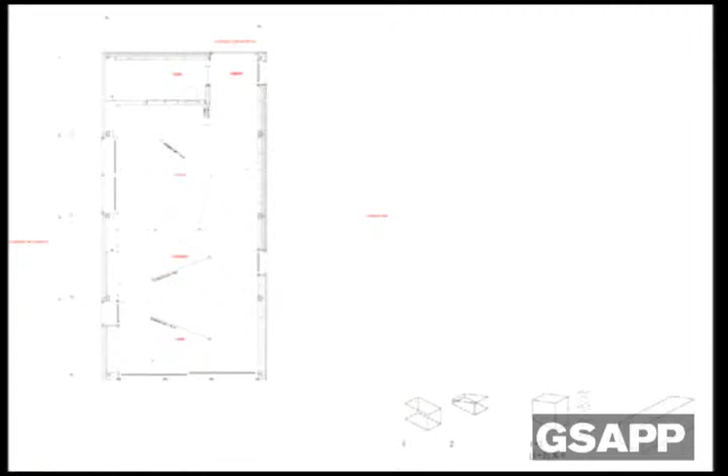With this collection, the only traditional architectural activity we did was to plant these steel columns in the site. We eliminated the sand accumulated for years on these stones, and during the winter, the water and snow were cleaning and washing them. In the spring, we placed these columns to receive the house. While planting these short columns, we expressed the idea of not touching the ground.

The house was built in a workshop outside of Madrid, a workshop not specialized in building houses. This project is not fascinated with the idea of building houses in factories—every time architects have tried that, it's been a disaster. This is one single house built in a workshop and moved to the place.

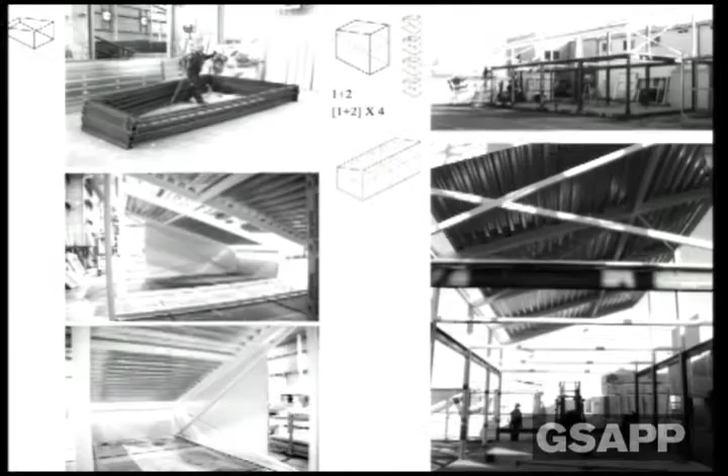It was nice because for four months we were visiting this place every day, and the project, the construction solutions and the construction systems were made in real time with machines folding the metals and cutting, not necessarily drawn previously by them.

We were limited by the machines we had there and the resources, and couldn't complain about not having this or that size. So they were trying to answer our necessities or interests in the best way, and all we could do is correct the details in the process to build the house.

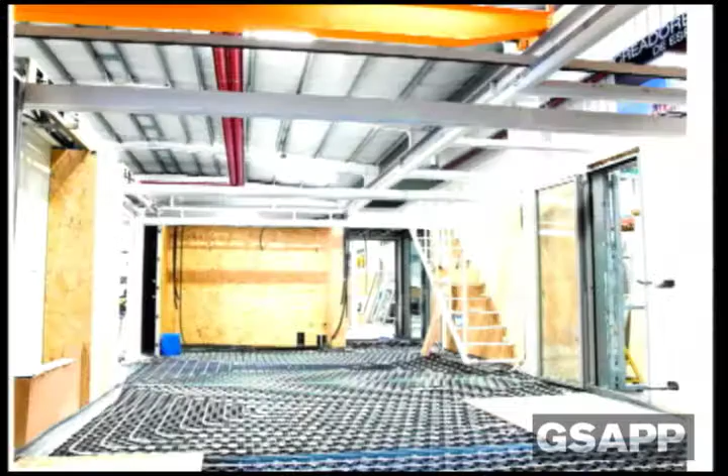That allowed us to have some technological inputs in the project that would have been impossible to do in the place where we were working, where there is no water, no electricity—we get all of it from the ground or from the sun.

So the house was built in these fragments. What's nice is that in one moment you see on the right, we test the assemblage of the different pieces, and the 40 guys who had been working in the production said, 'Hey, it's a house.'

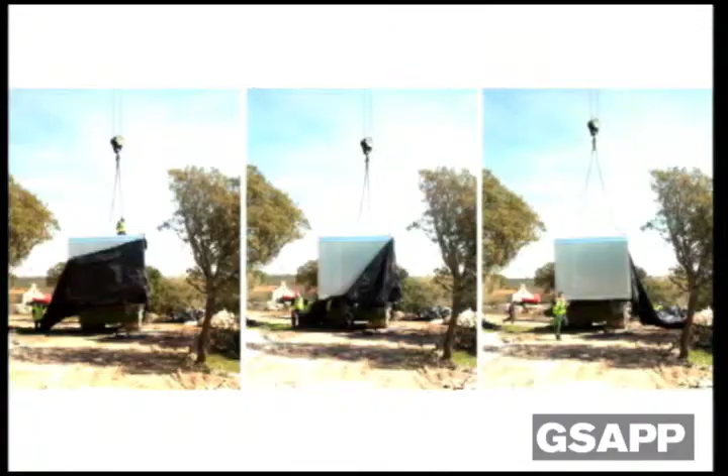So we moved to the place, and we planted it there. The house stayed with a beautiful attitude, no?

Looking at the landscape and appreciating it, showing clearly where to look, where the beauty is, and not trying to emulate or integrate with the materials, colors, textures, or even the shape. All of this is completely contrary to the regulations about popular construction in this kind of context in Spain. But we argued that it was like a big truck.

Stop it for a while here. So the house is there, and it really represents this idea of exploring new relations with nature—not the relations of fascination, not the good and bad divisions of history. It's not expressing that the city is always bad and nature is always good.

The interior is completely industrialized and simple. And I have a video here.

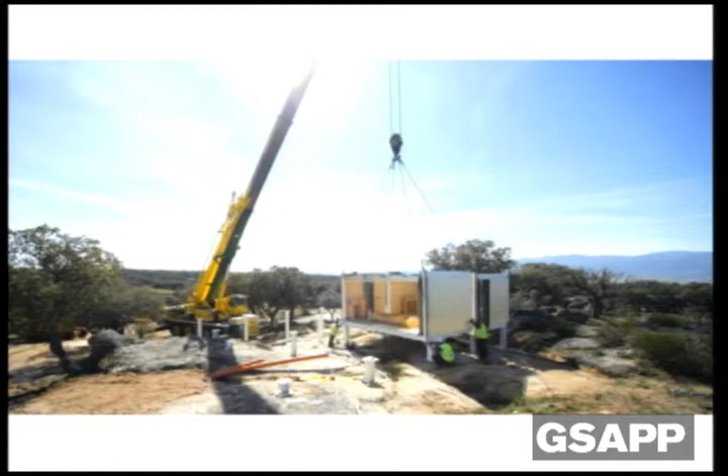The house was installed in 12 hours, from 8 in the morning to 8 at night. This is Spain—now it's siesta time. So, 11 hours.

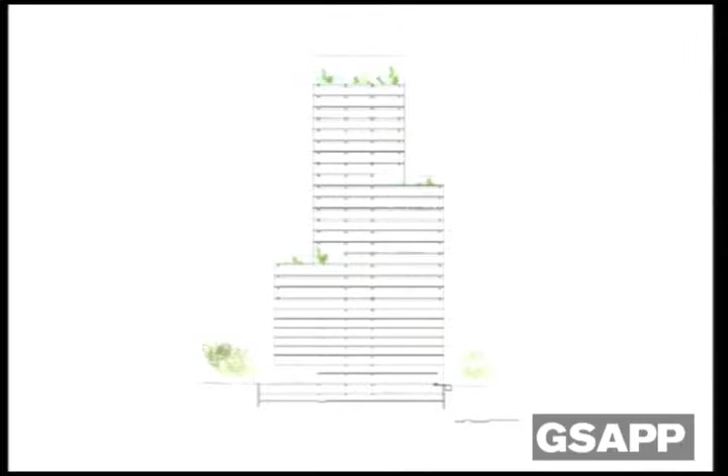And I explain this because we will see something. So we were organizing this project. We got this chapter of designing the typology, of inventing the volume, taking care of the general typical floor with a core and a structural composition that could allow these different step backs of the setbacks of the tower going up, and also the parking.

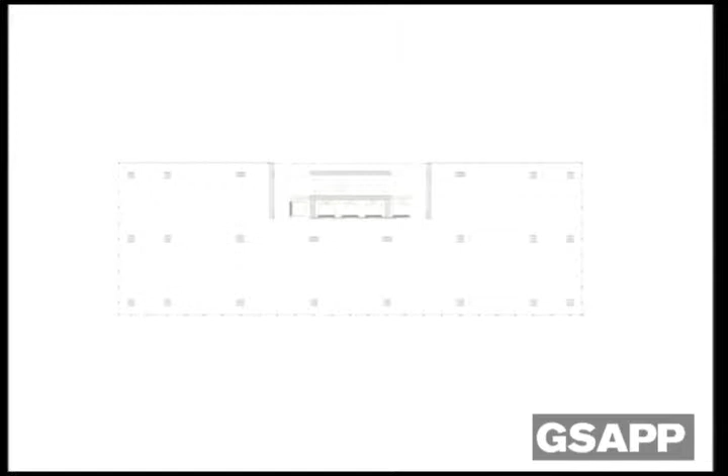So we were working on this parking. It is a kind of main lobby and main reception space in these buildings, nothing related to the interior of the rest of the building.

And of course we designed also the facades with the idea of this random composition of the facade - first, it's impossible to count the floors of the building, so that's good when you have fewer floors than others. But also to make visible these points, these accents where the tower represents a kind of main space of every one of these independent buildings.

And also to be able to integrate these ventilations in the garage floors, mimicked with the working space on the top floors, which is curiously the first time it was done there. It's the first time that the tower in the parking floors really looks the same as the rest of the building, more or less - and not like a parking without any other intention.

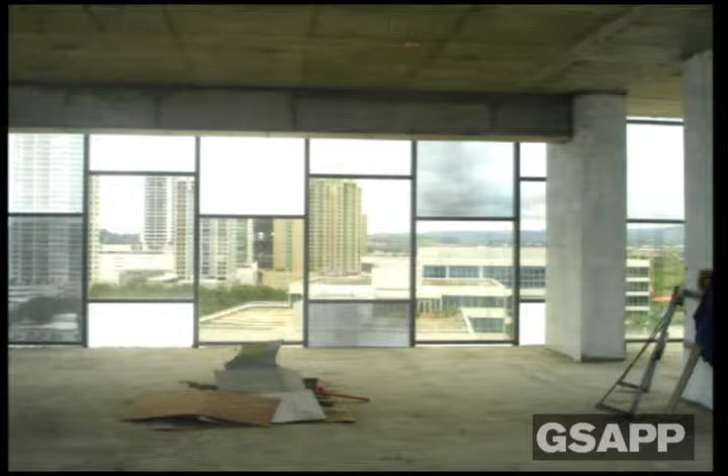I'll show this fast because the elevation works with these pixelized glasses, a composition looking for environmental equilibrium in terms of solar energy incorporated into the building. So we can manipulate the different elevations of the building, but also create this pixelized perception of the environment, which is not very interesting when the buildings are close, and more interesting when they are far.

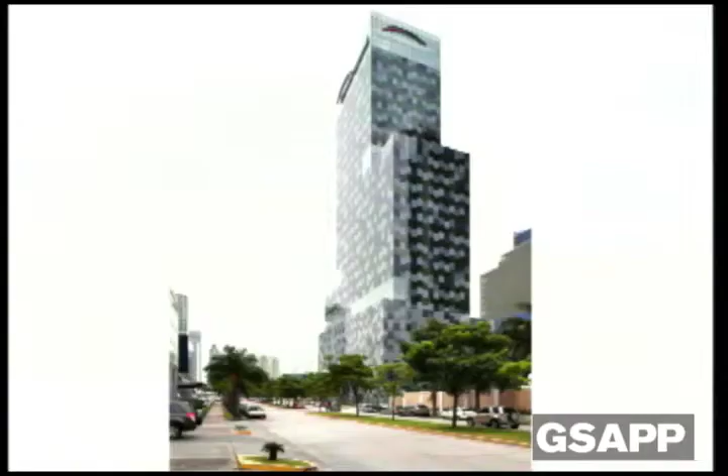So from the outside, it's difficult to believe that every one of those pieces is glass - these are the ventilations of the garages. Here you can see these garages creating an urban spirit and urban presence of this tower at night. And this is something I really love.

You see this is the credit card of Ignacio Mayol, perhaps you know. So this is the moment in which you design a tower for a bank, and the bank puts your building on the credit card, you know. It's really interesting that the idea of the building can really be incorporated like a communication instrument or like a corporate image. This has happened many times in history, of course, but I think today these two items are more and more important in our society and culture, and we have to take it seriously.

The third architect is this architect as mediator. That means we don't have the power, or don't have all the power like usually we had in the past - or perhaps we hadn't, but we complained a lot for not having it. But now we can not have the power and be happy anyway.

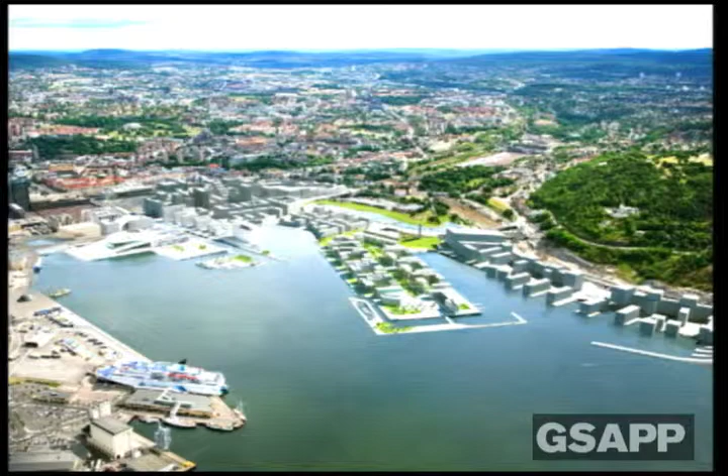I'm going to show this fast. Oh, this is just a better view.

And this is the building. This is from the competition image.

I'm going to show only documents of this building done with the intention of establishing conversations or open dialogues, or to answer questions or concerns that we received from many different points.

This is a diagram, you don't read it very well, of the people involved in the project. This is one of the diagrams we had to prepare to explain how complex a project like this is today, where the architect is not in the center. I've shown this diagram a couple of times. The architect is on the right, perhaps sometimes has to go to the center, but not all the time. The client has a very prominent position, and the consultants, technicians, experts, and the local office we work with, LPO, have a quite important role in the project.

So this is also to explain how today the projects we do are the result of the selection of an incredibly big collection of different inputs of information, bits of information that all these people give to us, and how you select them and reorganize. That is the project, the contemporary architectural project.

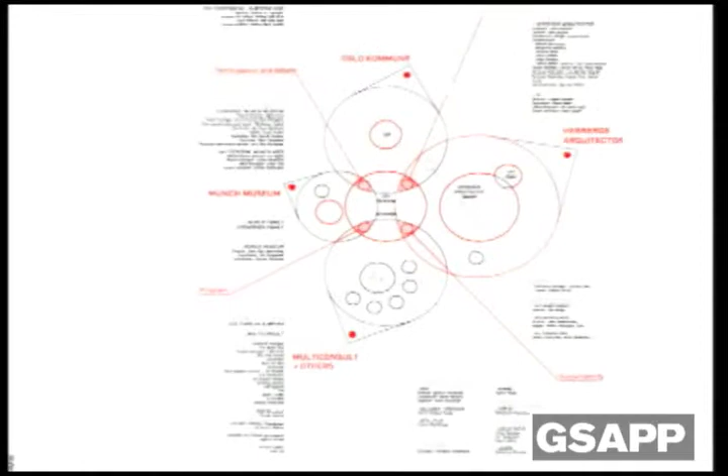You see these 4 points. One of them is participation and debate, urban planning, sustainability, and program. Participation and debate is the one I want to refer to in this description.

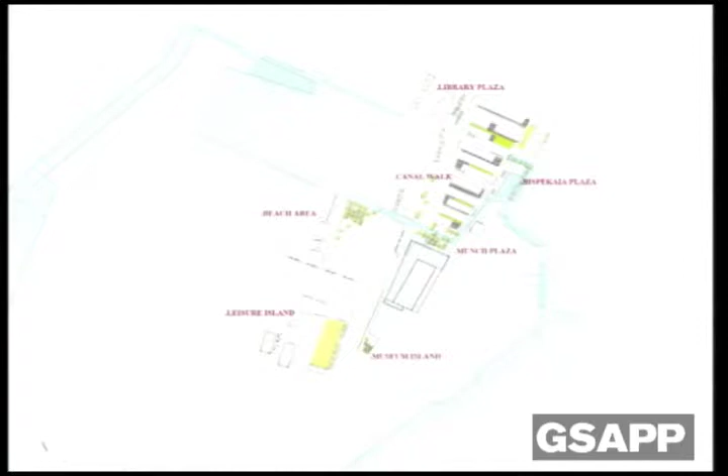So we started with this drawing explaining how important it was for a museum like Munch to create enough public space around it. So one of the reasons to be vertical was to not expand across the site. That is a very tight space, and many of the competitors were using all the ground. That means the museum was not really offering the citizens more than a building, which is good for tourists, but for the citizens, it's perhaps better to have all this space.

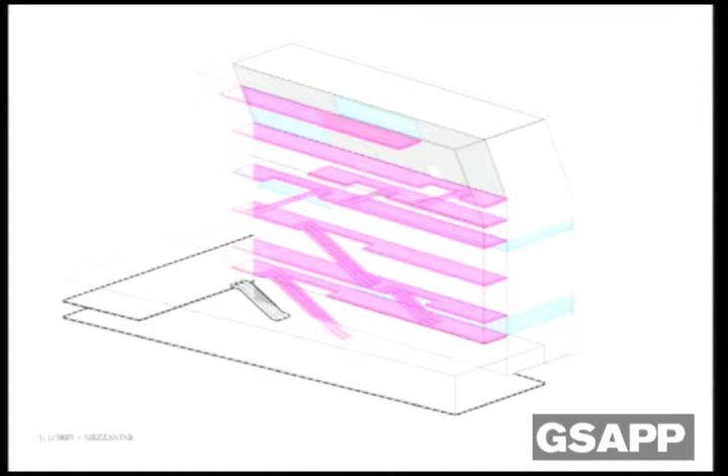The second was about this concept of creating a kind of vertical plaza, connecting the lobby with the top of the building, something that could be open at night, also when the museum is closed, and dividing the project completely into 2 parts: the dynamic part and the static part. The static part is the museum itself. It's a collection of rooms that you have to enter, watch the pieces of art, and go out and go to the next floor. That means the rooms are only for people who are inside watching the paintings, not necessarily crossing because they want to go to the next one or whatever.

So this idea of creating a kind of public infrastructure superimposed on the museum program - you see 2 colors here. The 2 colors are because one of the problems on this site, which is by the sea, was to place all the services of the museum. You know that in a museum today, the services or non-exhibition spaces are more than 50%.

So our decision was to place that in between the exhibition galleries, so people going up through this kind of collection of platforms could also understand that the restoration department, the administration department, the education department are there, and they are huge and important. There are 100 people working not only to preserve a collection of paintings that are highly valuable for every Norwegian, because Munch is finally the most important artist in history. They are really working to make this like a condensator of urban life and experiences.

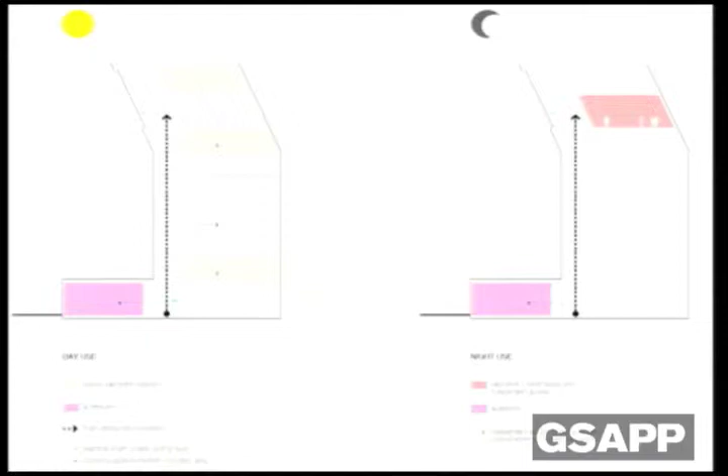And the building, the museum, is for the people. It's mostly for the Norwegians or the people from Oslo, more than for the tourists who are only using, let's say, the galleries. So this is the first lobby we drew. This is the first dynamic part, and these are the galleries.

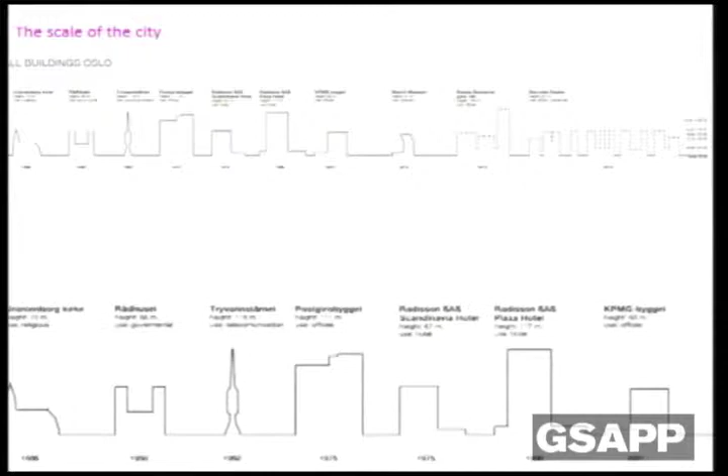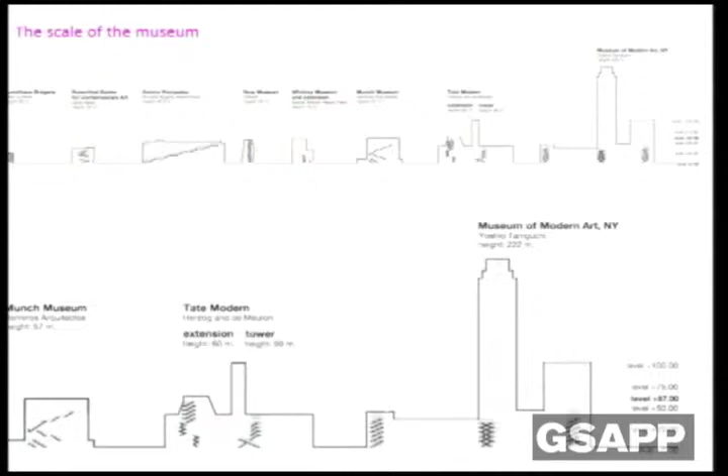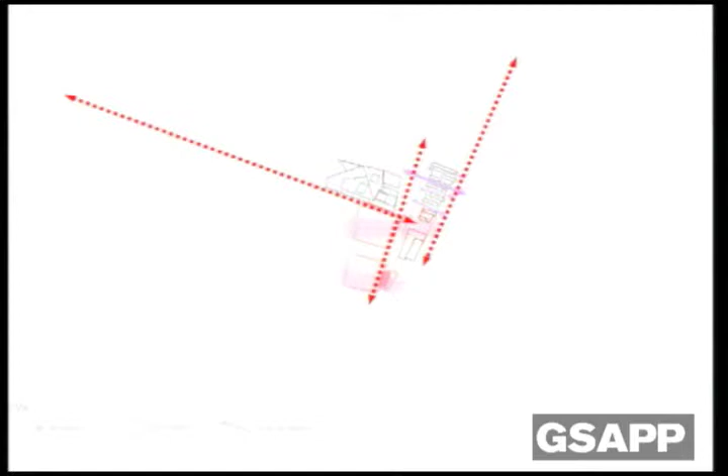So we did all these comparisons of the high-rise buildings in the city, or vertical museums in the world, or how we were actually creating the starting point of a very important axis in town, engaging all the other museums existing and future. We did hundreds of these models to explain why we were proposing this. But at every step, something new arose or landed in the project, and something was changed. Apparently not that much, because the shape looks the same, but really the building itself changed a lot, or at least from our point of view as architects, we know where.

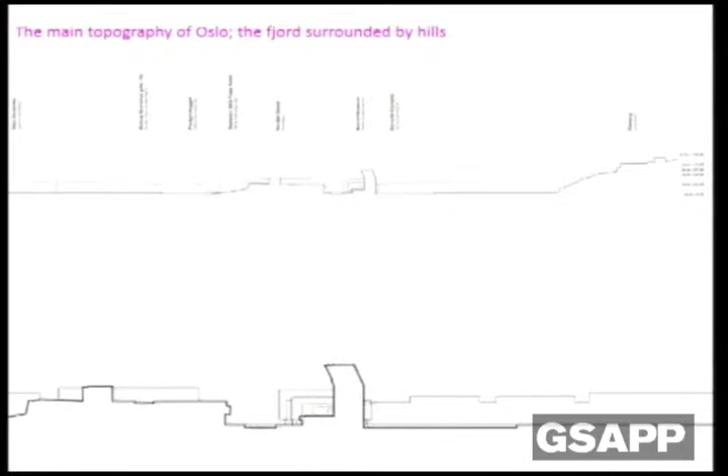Especially in the interior, the changes were very, very important. This is because of the views. This is a kind of sacred mountain. It was where the city was actually founded initially, and so we were competing with it.

So this is the only floor plan I'm going to show, to explain that also in the interior design we had long conversations about the general organization of the floor plans, because they were very simple. But we did research about the ideal size of art rooms for museums, and we discovered that 90% of the big exhibitions going around the world in itinerant programs ask for 900 square meters, more or less - that's 9,000 square feet. What that means is it's better to have 600 and 300, like a big room and a small space for small pieces or whatever. So that's why we divided the floor plan into these two rooms, and we placed this core.

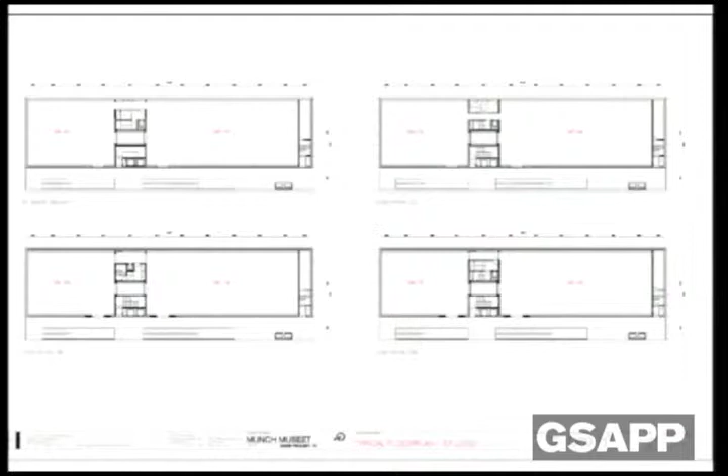I'm not describing the building, and it's not my intention. The intention is to describe all these discussions. This is a discussion about the program.

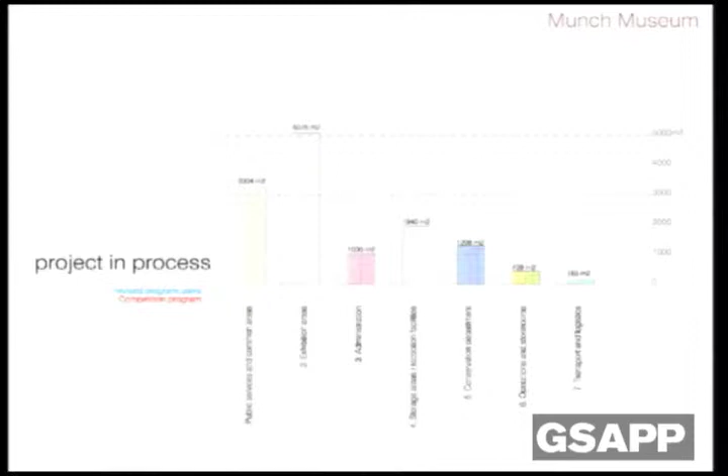In the competition, you see the exhibition space that we offered and the services. At the first meeting, every person at the head of these departments were asking for more, so the only area to take off was the exhibition space. That was the second meeting we had - this was the exhibition space, and all of them were happy, but not the director, of course. So very slowly we started to grow again, and for that we had to compress, we had to change the floor plans, we had to demonstrate that it was possible. But in this process, many things changed.

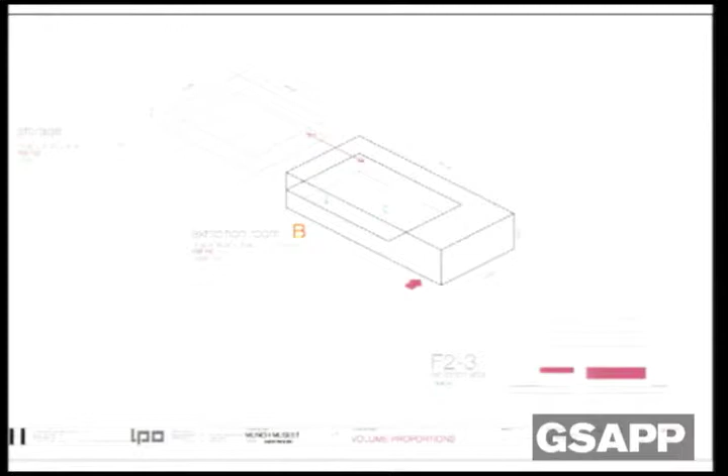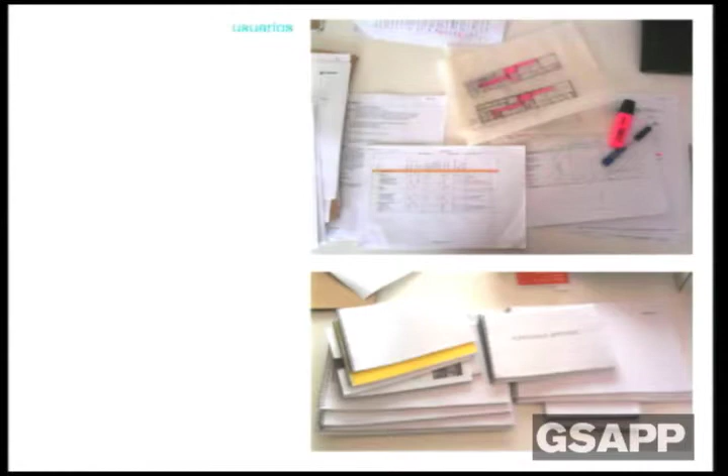I hope you don't understand Norwegian.

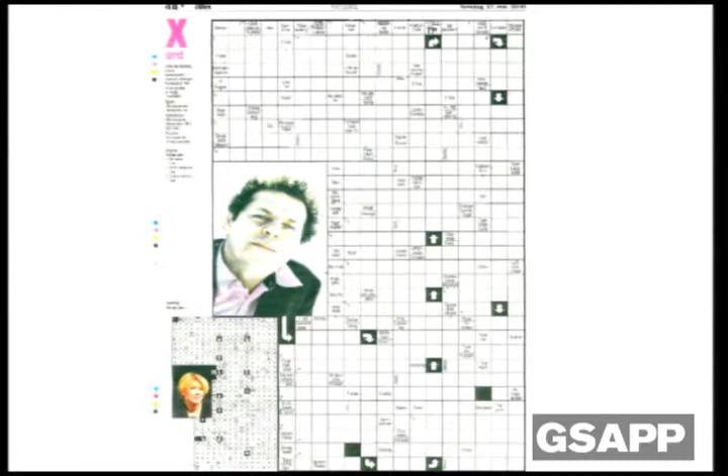But this is what I like most, because if you do this in Spain, nobody would have a beautiful Sunday - this is in the Sunday newspaper. If you don't know my name, you can't start. So that means - and the question was something like, this guy will build the Munch Museum if the Heritage Department lets him do it. That means that the director, or the people at this newspaper, which is the most important newspaper in the country, was completely convinced that the people should know Juan here. If you do this in Spain, nobody knows. This is a demonstration of how today, in many places, in many societies, especially in these super democratic countries where everybody has a voice that has to be attended, these phenomena are incredibly viral and strong.

This is the last of the communication ingredients - a torch parade. Torch parades in Scandinavian countries are quite an important demonstration. They are never done for political reasons; they are only done for humanitarian motives, something that everybody should agree on, like against war or any social concern. It was the first time that a cultural concern was raised in a torch parade.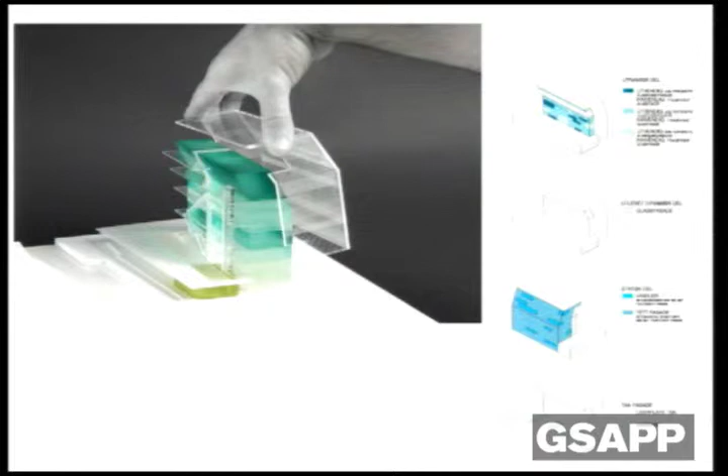So the last chapter of the discussion is about the facade. We were looking for this enigmatic, blurring presence of the building, with the idea that the weather in Norway is cloudy, but also quite rich in different lights.

Every hour is different. Edvard Munch had this interesting attitude—he never painted landscapes outdoors, he was not a plein air artist, but he used to paint landscapes in his garden, as you've seen before. He said, I don't need to see the landscape, but I need to feel the cold. So he painted outside to have this feeling of the weather hitting him. In this case, he's painting his friend, who is in the same position, making the same effort, naked like him, not protected by a hat or anything, just to understand his pain or effort.

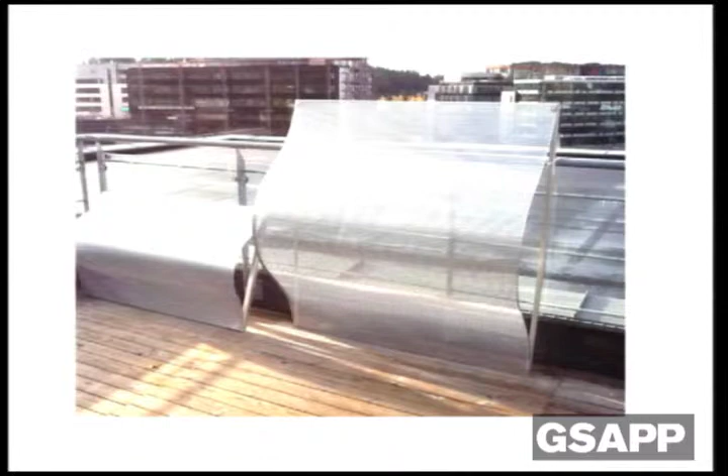That's because we also tried to make this building a permanent response to the weather conditions—ready to be stimulated by the sun, by the clouds, by the light, and also, as we will see at night, by a transformative kind of lamp.

This is a beautiful image. It's a pity that this web page isn't working anymore—I think once Instagram appeared, this kind of experiment finished. This was a web page that registered where tourists in Oslo took their pictures, redrawing the map of the city through the places where people were looking.

This is the Vigelands Park, historically the most important tourist destination in Oslo. This is the center—the castle, the town hall. This is the main street where all the museums are, and these are the islands where the other museums are too. And this is the Snøhetta building for the opera. So that means that two years after being built, one single contemporary building could attract as many people as many other attractions combined.

And it stopped, so we won't be able to know what happens once the Munch Museum appears here. But it's beautiful to understand how architecture can really do something for a single city—something we hope happened with the opera in Sydney or Bilbao, we know it's possible, but it's really striking to see the representation of it.

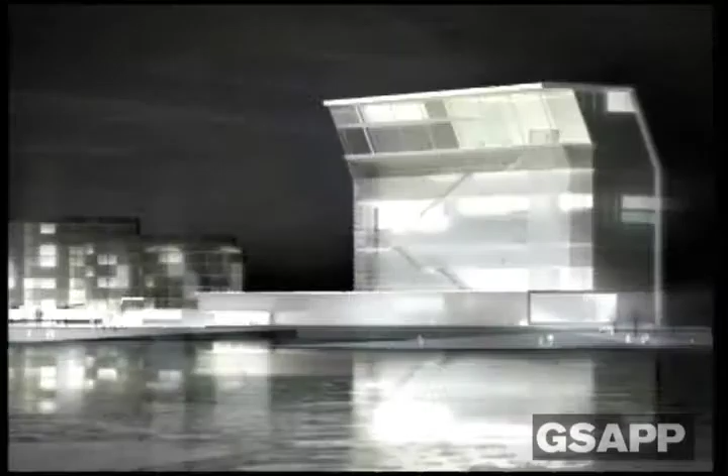So I'll go fast now. This case study is not the fifth, it's the fourth, of course. It's the architect by email, no visits. Some commissions are so small and so far away you can't go, but you still have to establish a system to work.

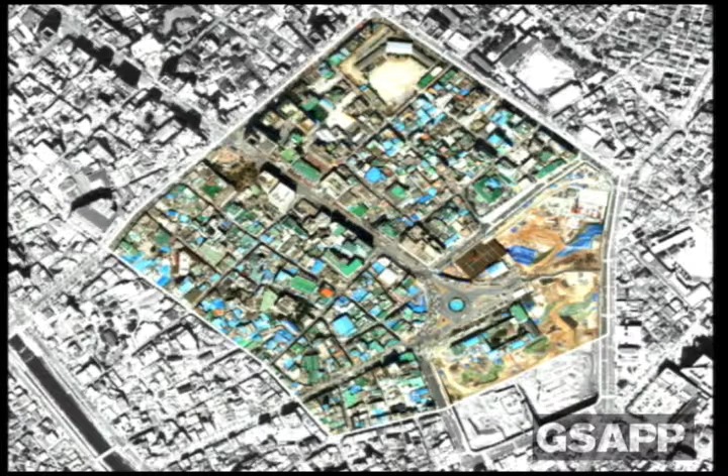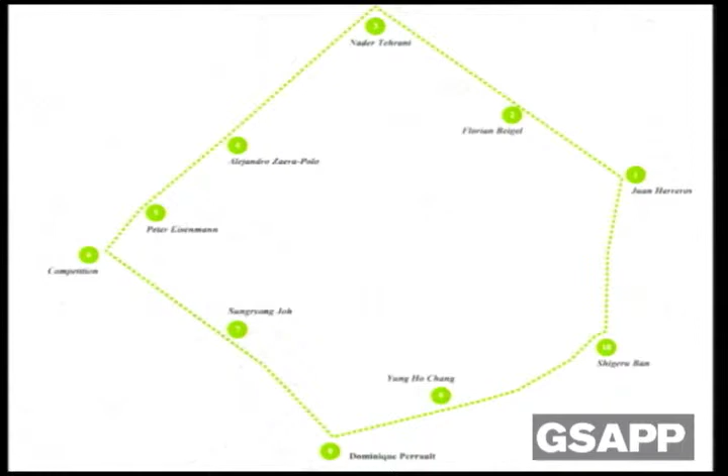In this case, this is Gwangju in South Korea. This is the original wall of the historical city—it doesn't exist anymore. The city tried to redraw the wall, asking architects for small commissions at different points to recreate this line. We had this corner, a very important place, and very tiny too—important because here was one of the corners where the fight for democracy in South Korea started. These things always start in a small library or bookshop, something like that.

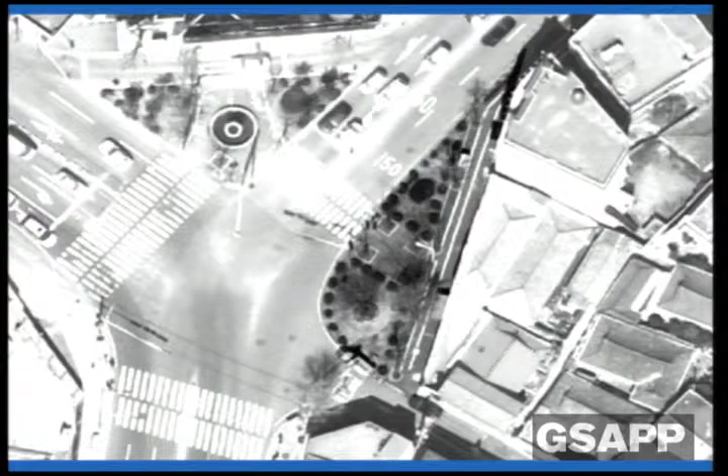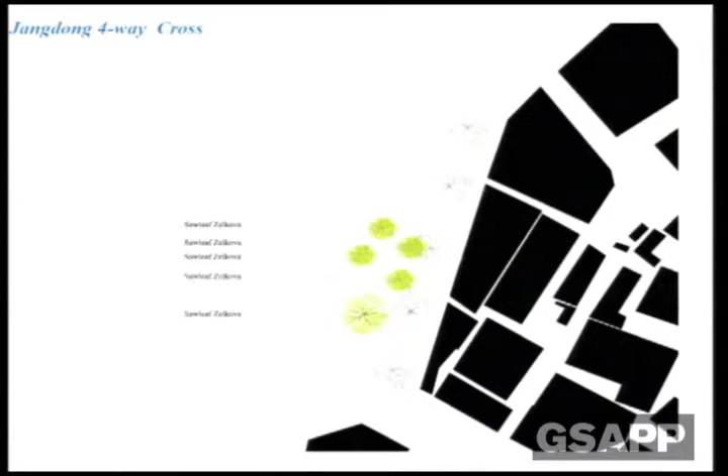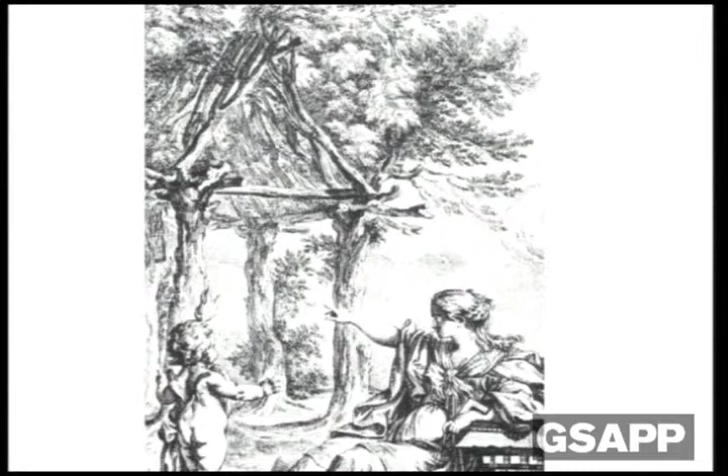So we asked our correspondents there to send some drawings—the trees, to recognize the trees, the names of the trees, the quality of the ground, some very specific views. And with that, we said, okay, we are going to do a manifesto of contemporary architecture, if I can say it like that.

Remembering two favorite images that we've had from our first years—one is this primitive hut of Laugier. The idea that primitive architecture, or architecture really starting, happens the moment architecture is not only there to protect, to cover, to defend from the aggressive outside, but the moment it can be light enough to represent a kind of transitional object between the body and the world, the landscape, or whatever. So it's the introduction of subjective perception, beyond just the parameters of climate or weather.

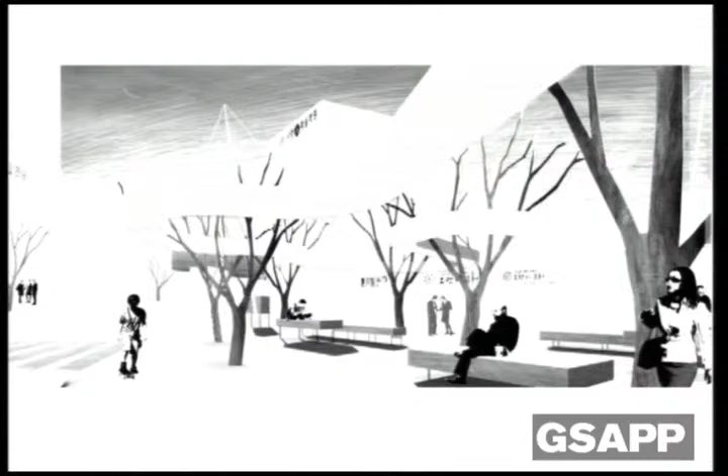This idea, illustrating one of the Reyner Banham books, was the one we used, saying okay, what we want to do is something like this, working with the floor of this space and creating something like that fireplace, but now conquering the air. The idea is remembering this concept, that apparently that hut was so weak that it was not a private possession, was not a house exactly.

So here was a manifesto about the collective intimate space, and I use collective intimate and not public private, that doesn't say anything. Collective intimate means that today the most public space, the most contemporary public space, is there where every individual can really feel an opportunity to express his or her individuality.

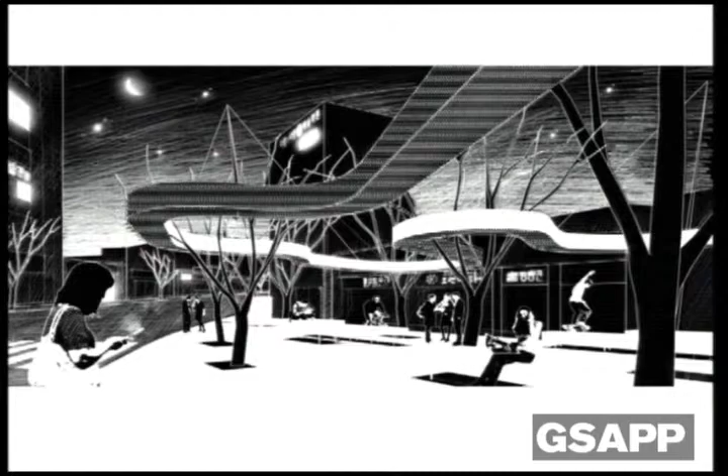So that was the idea, and we were sending all these ideas to our South Korean colleagues. I don't know what they were thinking, sending these images about how we want to incorporate the trees as part of the design. We want to create some light on this lamp, but the light is also heat, it's also information, it's also music, it's also Wi-Fi antenna. Perhaps today Wi-Fi is not necessary, but this was just 3 or 4 years ago when it was not so easy. So our drawings were very simple, like this.

Looking for the image, this is the opening night. This guy is Paul Miller, DJ Spooky, perhaps you know his music. And the floor, like in the Reyner Banham idea, with some of these pieces going up, emerging, not exactly with the shape of a bench. The heights were kind of strange, lower than a bench, higher than a table.

So the idea is that when you do something there, you are inventing how to use the place. So finally, as you are seeing, it was built, and people use it 24 hours. This is the day of the opening, a typical scene, some people perhaps preparing a party or a botellón.

Okay, this is number 5, this is the last one. The architect is an expert coordinator, not an expert on everything. The architect has no idea about many of the chapters of our projects, but we know how to talk about them, we know how to ask for help, and we know how to listen.

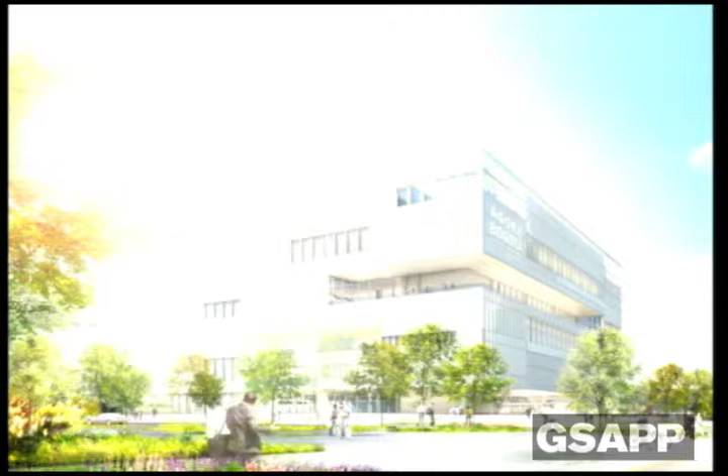So this is a huge project, this is the Bogota Congress Center. It's 75,000 square meters, and it was also an international competition.

We won this competition with a very simple concept. The idea was every Congress Center has a lobby, and the lobby is like a closed space where registration and all these rituals of the Congress are done, so it's not part of the city. Because of the place we were in, and to not block the connection between different neighbors, we said this will be a plaza, a square, and we will have all these small lobbies in front of every door of every room. We have rooms in this place for up to 5,000 people.

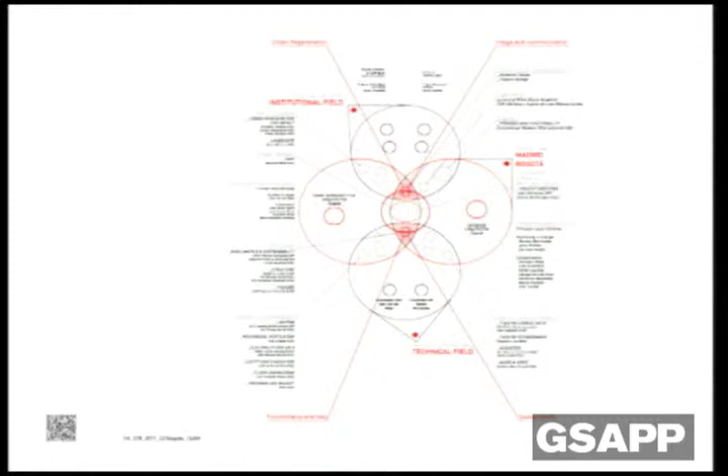And the spiral movement tells you where to go, very easy to understand the composition and the way of using the building. One of the first decisions, this is the scheme, this is all these people working, the experts I mentioned before are all here. I don't want to lose more time here.

One of the first decisions in this project was to redefine the typology, saying okay, this is a Congress Center, but we are not going to do any auditorium. That was a shock. We said okay, we want flat rooms from 25 to 5,000 square meters, where everything can happen. You can extend, join, divide them.

The auditorium part, especially if the event is a congress, is really easy to install. And it's stupid to not be able to present a new car or do a techno music session one Friday night. You have a parking with 3,000 cars, so it's the best place in town to do that kind of thing. So you can do festivals, a fair of flowers, or antiquities, or whatever, because otherwise you'd have the sloped auditorium, typical, functional, safe. So everything is going to be flat.

The second was more complicated to convince.

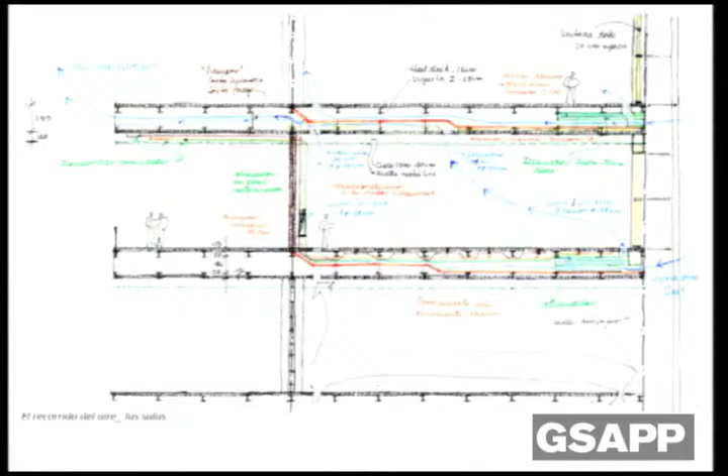What is interesting in this discussion is we had local experts and international experts. The international experts were saying okay, it works, but we are going to put some machines in the corners - perhaps they were afraid of having problems. The locals were absolutely resistant. They were really convinced they could do that, and they could be the heroes of their town, so they were not afraid about that.

What is important is to discover that the first answer of these experts was: if you want to do that, every floor will need to be 3 meters deep. So we said, we have been fighting all our life to have thin floors, thin slabs. But the structural team present in the conversations said, okay, with 3 meters I can do everything. So finally we accepted that some of these extreme conditions create aesthetic consequences in the buildings.

One of the questions in sustainable culture is that today we are doing bigger and bigger carpenters for our windows. We have spent 100 years trying to make them slim, and now we are doing the opposite. So this is the appearance of these spaces that are really big, and a lot of things can happen there.

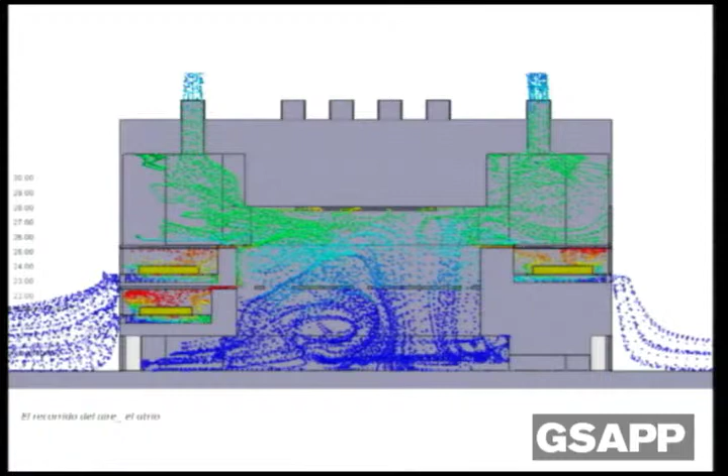They are so big and so important that we have to draw the floor plans of the interior of these spaces. These are beautiful schemes explaining the movement of the air and the variation of temperature from 7 in the morning along the day, exhausting the air on top. Every room was studied with the help of this, over Arup systems.

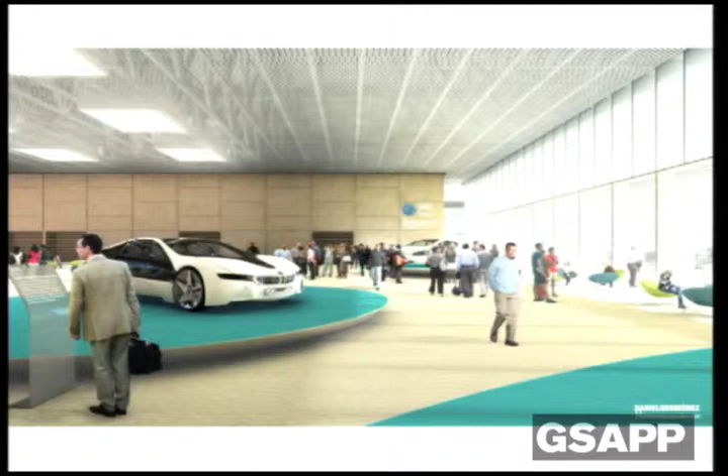Finally, one of the conclusions was that we could really save tons of energy and create a cheaper building if we reduced the activities on the facade that had to be directly connected with the outside, especially on the south and west - like everywhere, not just half of the world.

That really is a strong ask, because it means you have to place, for example, the technical corridors or service corridors on the facade, because they will always be service corridors, so you can accept some less quality, or 5 more degrees in the air, etc.

The consequence of that is finally we placed in the entire perimeter of the building the different parts of the program that are going to be fixed, hopefully. The kitchens will always be kitchens, the warehouses will be warehouses, the corridors will be corridors, because the flexible part - the rooms - is inside, so perhaps not with a typical connection to natural light.

We created all these families of mullions and different glasses to place only the expensive ones at certain points, and also understood that 40% of these glasses can be single glazing rather than double. All this relates to the building being heated during the day, but at night it has to be cold again - if you put double glazing, it's like a jail for the air, and the air never escapes. We need the night to start from zero again. That's why the glasses are really single. I'm not going to go on about this.

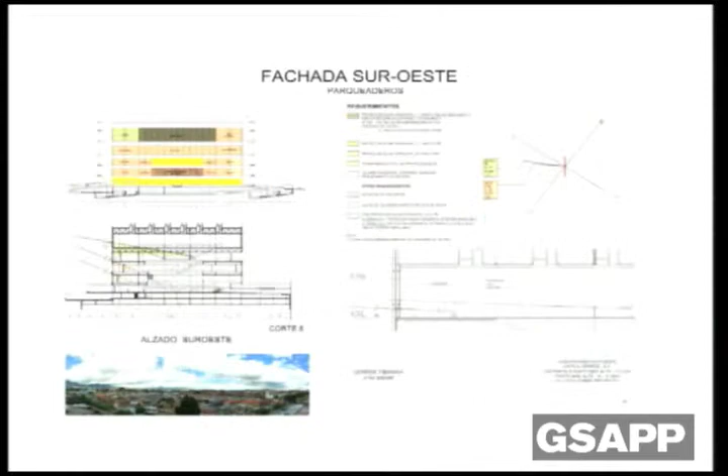But this is the reason for this diversity, apparently random - you can identify some of these slabs, for example rooms that are closer to the facade than the technical or lobby parts. And this is the same argument, but for the installation in the city.

I have a video - I had a video for the Oslo Museum. I have forgotten, it's okay, it was wonderful. But I have a video for this, we can see it. Can we? Yes.

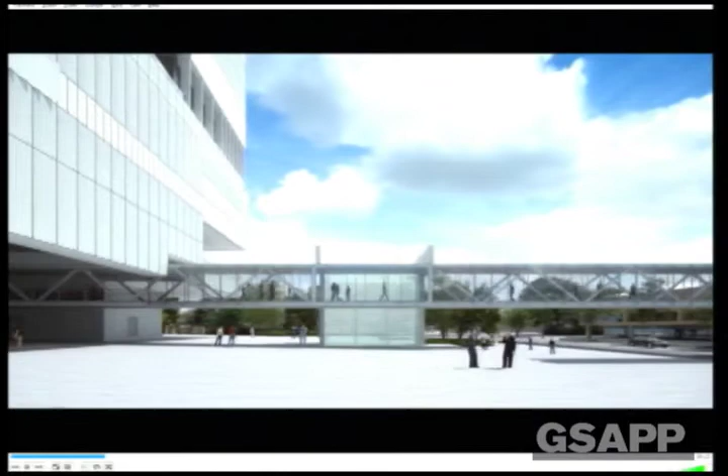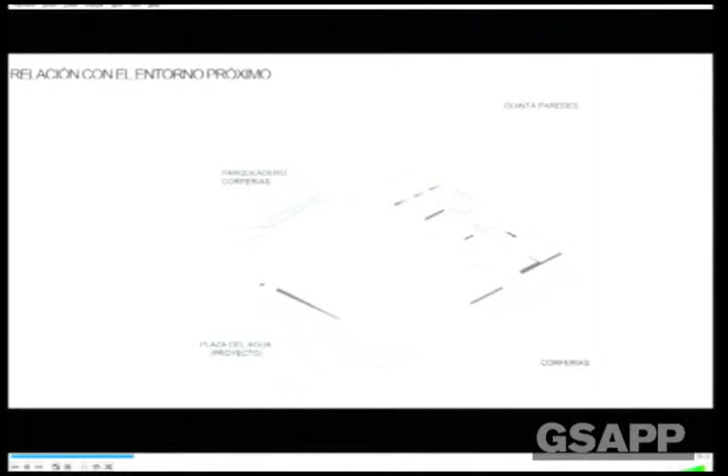It's important to say that this video and the video of Oslo are done without architectural intention, so I'm not in love with it. It's absolutely something done after the design process. And every lecture I give, somebody asks me, do you do the videos at home or at your office? These videos are really directed by us with the intention of helping our clients promote the building.

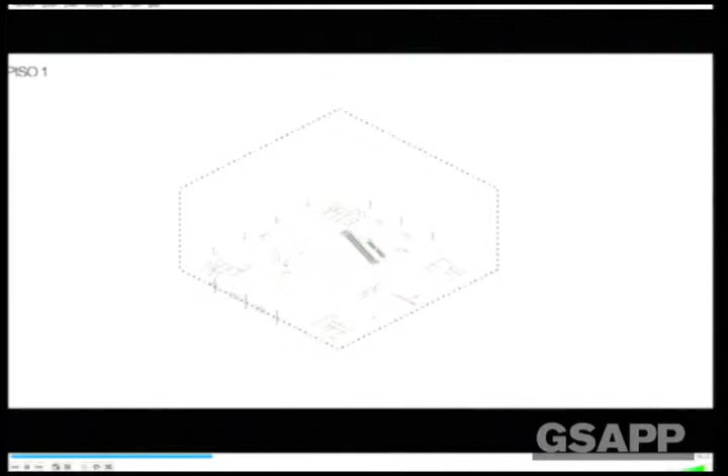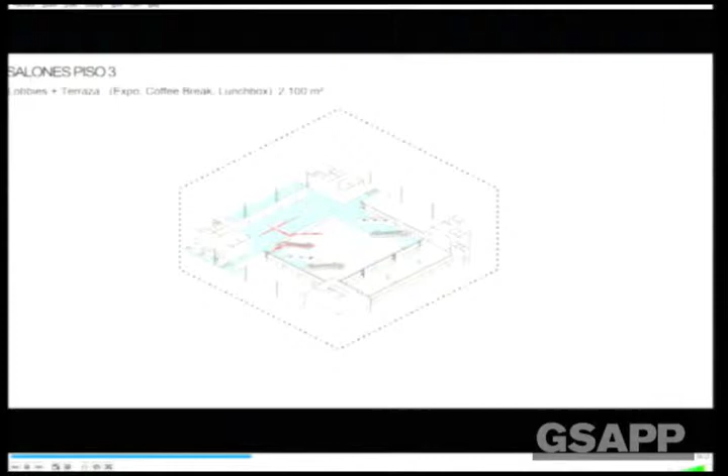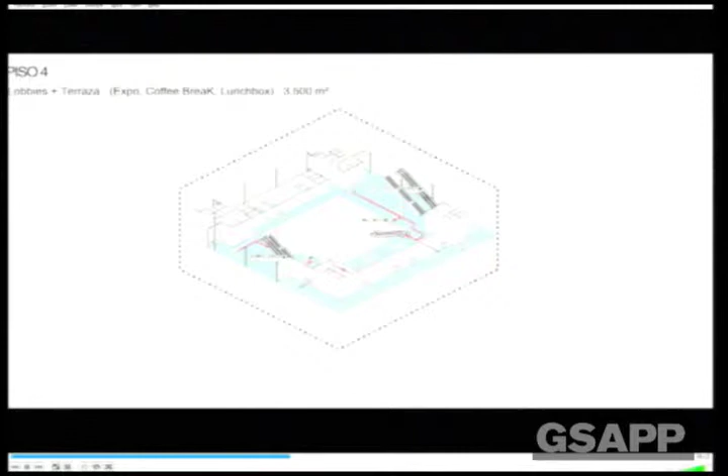I think it's interesting to say that, because we have this over-presence of renders, videos, and animations, and sometimes we don't understand why we make them. The understanding is that we don't need the renders for ourselves. We don't need to discover something we can't see in the drawings we do, because we know that language, but we need them to transmit to others—it changes the image completely. You identify many times how architects make renders, but they're not making them to really explain to others, or they're not understandable renders for others. They're in a kind of private language for architects, which is unuseful work.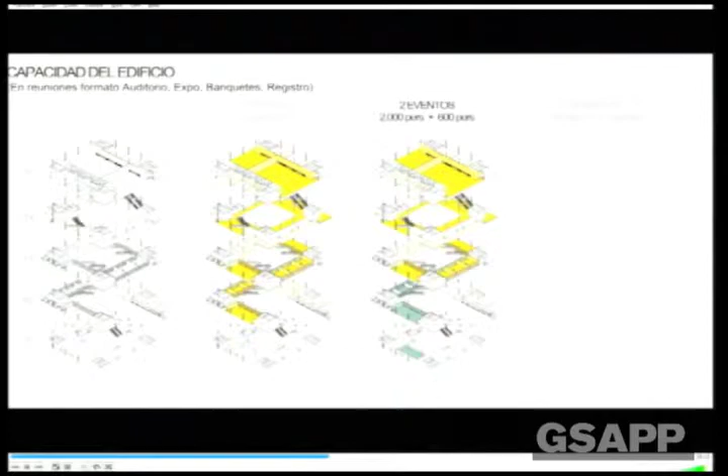This part of the explanation of the circulations is going in that direction—to explain to people who find it very difficult to understand the drawings or the sections. So this is a promotional piece.

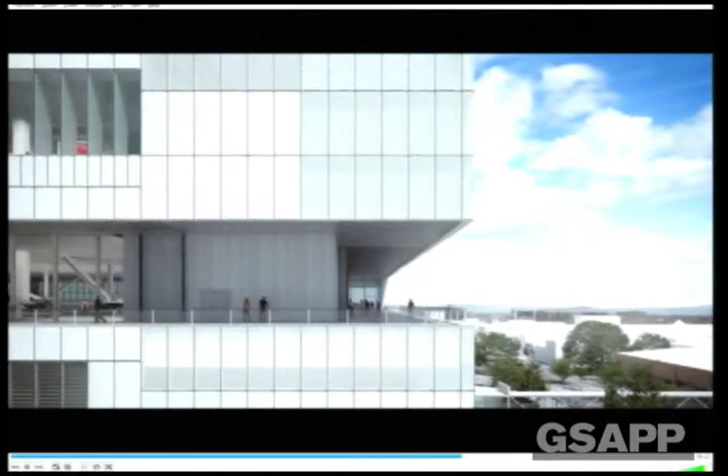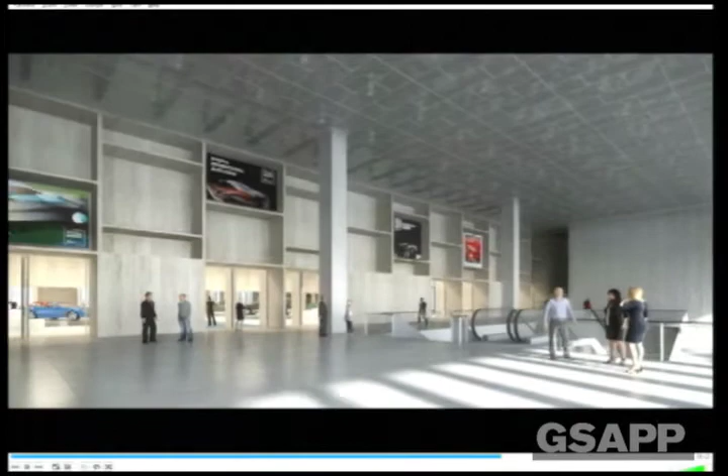So what we have seen in these 5 types of architects is the incorporation of social, economic, and environmental ingredients into the design process. I think this is a great opportunity to give architecture back an important role in the construction of the present and the future, because I have the feeling that architecture is a little bit outside the forces that really shape the world today. We are quite confident in architecture, our private architectural world, but I'm not sure the world outside is confident in that. That's why I think it's so important to be critical, radical, and experimental.

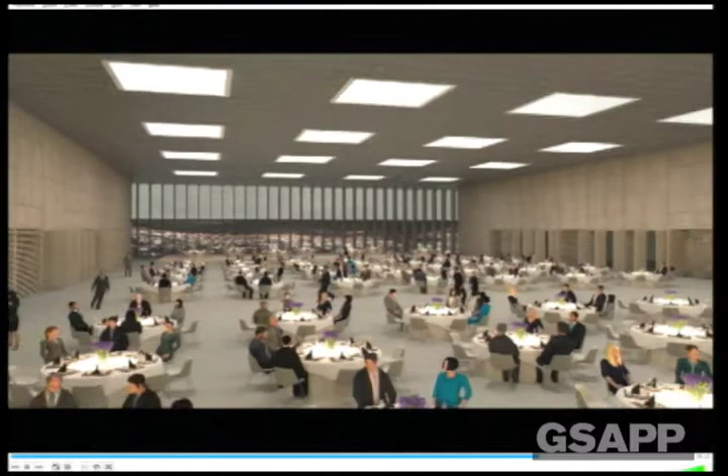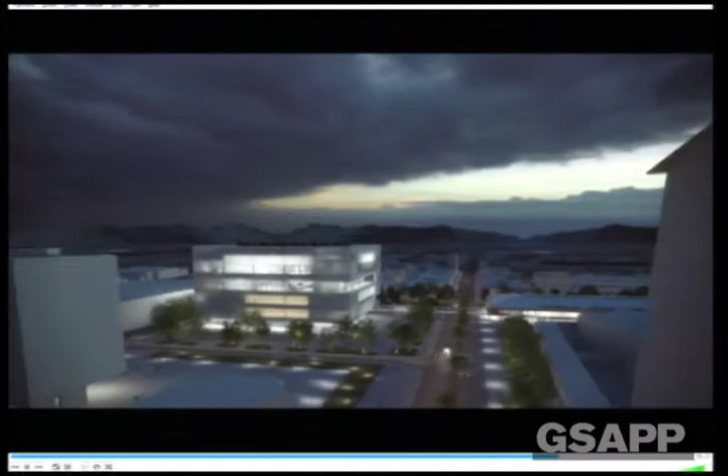I think that's one of the most difficult things—to identify what is important to do, or what is important to get. Finally, I think the idea of dialogue is absolutely against any effort to impose our point of view on others. Dialogue is also against the overvaluation of being misunderstood, of being the hero not understood by the world, from the solitude of our wonderful ideas.

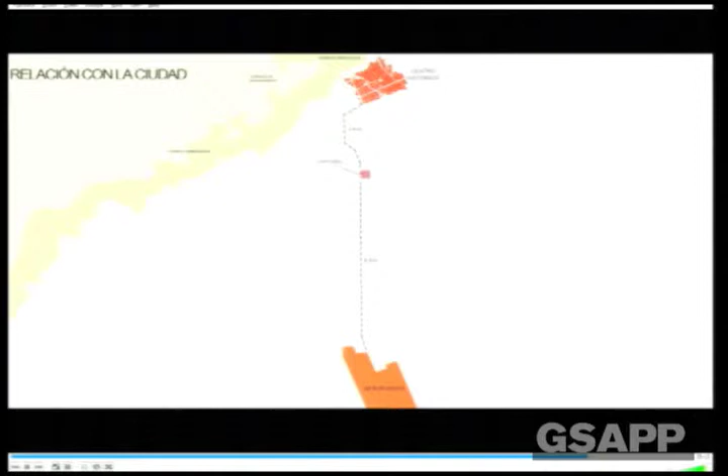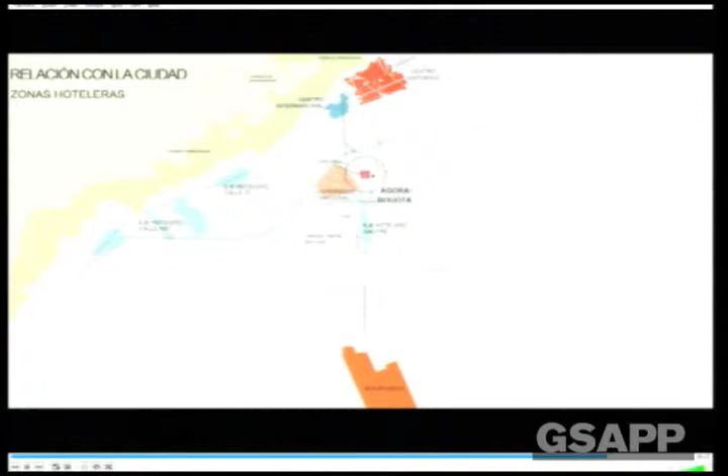I think dialogue is the way of going out and trying to demonstrate that what architecture has is for everybody, because finally architecture is for the people—for everybody in the city or in their houses. That's all. Thank you very much.